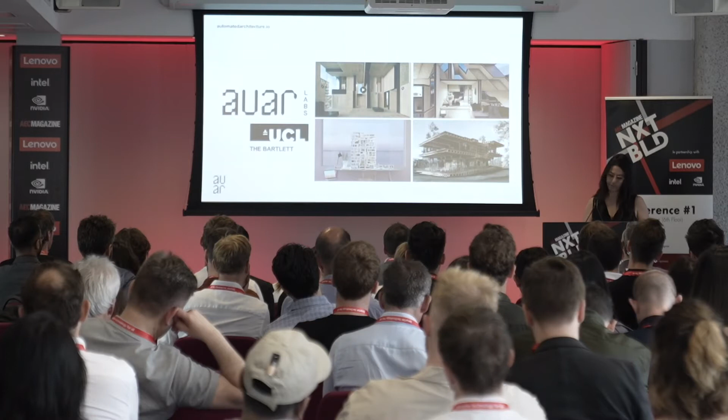So I'm going to be skipping back and forth between projects from the lab and projects from the company today, but I'm just going to set you guys up first before I show you some of those projects. So the work of the lab really fuels our mission to radically rethink housing production. We all know housing needs to change. We're not only in the midst of a housing crisis, but we're also in a climate crisis, and that's only going to exponentially create a worse housing crisis.

And automation is seen often as a possible solution to this problem, but we see a building industry that is really not set up for its adoption, and it struggles with outdated models of practice and power structures. So in our work, we like to think of how we can dismantle these practices, and how can we design an approach for architecture and automation that's better suited to deliver on these kinds of needs. And this really comes to the statement, we can't just automate the building industry. It must be entirely reinvented from the ground up.

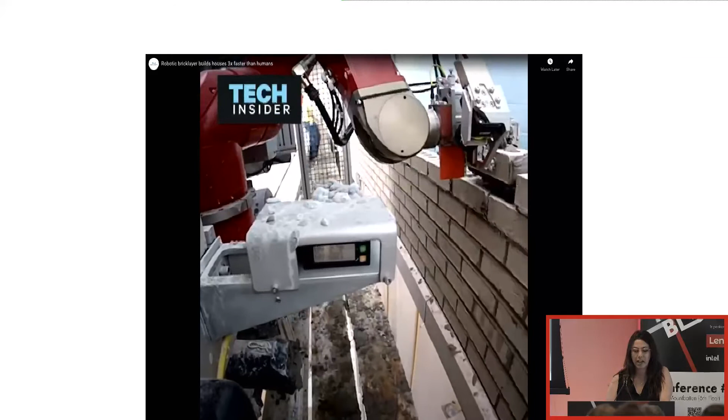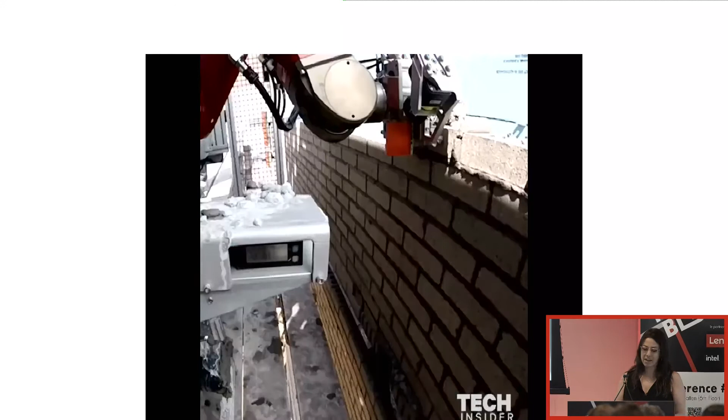So we see our approach to automation as providing an alternative future. And we're combating some of the most dominant media narratives around automation, such as our friendly bricklaying robot that steals jobs, but solves very narrow and very localized problems in the industry. We also see it as combating the idea around the issues around construction automation investment at the scale of the factory. We see, for example, modular housing factories resulting in the centralization of production to off-site factories, and these are very disconnected to the context in which these kinds of products are deployed.

And factory-made housing in the places that we're working is often seen as displacing local jobs, and this creates a kind of resistance and skepticism, not-in-my-backyardism, in those local communities. And it creates a very limited, localized capacity for housing produced using automation. And we know what's key to the climate crisis is this idea of localization, so we can't ignore this major issue.

Now, we like to think about the idea of the modular problem. So the efficiencies of modular construction are really compromised by centralized factories that take huge CapEx and OpEx. These factories require huge amounts of funding, and they result in a very long payback time. And the margins that are achieved here are relatively low.

Centralized factories require a high degree of repetition. They're not able to efficiently adapt to clients' briefs, site, or legal constraints, and this results in very repetitive, one-size-fits-all housing, or really this kind of almost lack of market. And the process of customizing these modular housing products is very expensive. Now, in this kind of model, construction still remains very fragmented, and bad habits from the construction site merely take place in a large shed.

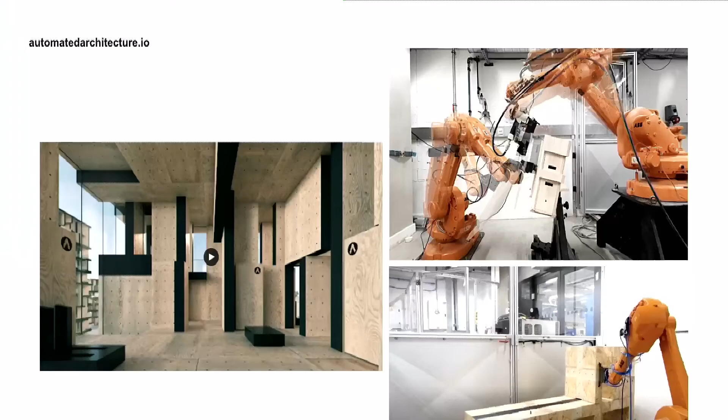And design for us touches on frameworks for labor, it touches on frameworks for interdependence, for policy making, and care. And it's really important to note that all of these practices are historically constructed, and they're designed practices. And insofar as they can be historically constructed, they can be redesigned and reconstructed.

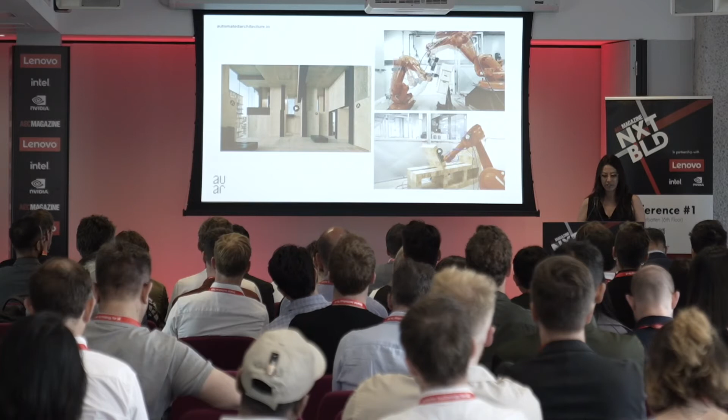And one of the ways that we've looked at this is through how digital architecture historically has tried to very much play innocent. But automation isn't innocent. Automation immediately forces positions. It forces questions about what a more automated society would look like.

Would we all need universal basic income in a world run by robots? Who owns these robots? What are the spatial and social structures that robots and other forms occupy? And how is our work and architectural production augmented?

We published a book three years ago where we explored these questions, called Robotic Building, Architecture in the Age of Automation. In the book we argue that there are deep cultural issues within architectural production that highlight the incapacity of current practices to adapt to automation.

When we use this term automation, we are forced to think about labor structures, platforms, data, but also about control and ownership. We're really forced to see automation as a design project. That was the real thesis of this book and has continued to be the thesis of AUAR.

So what then is an architecture or architectural framework designed for automation? What we've proposed in our work is a radical redesign of how architectural parts relate to automation, in two ways: both as a process and as a framework for production.

For example, in relationship to the context that we are working in, one of the questions we like to ask is how easy is it for people to access the benefits of automation?

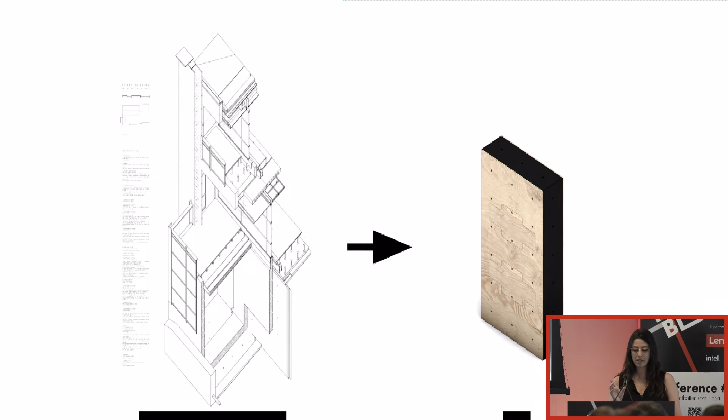What that has done in our work is resulted in a proposition that a significant reduction of architectural parts is possible, down from thousands to one. This enables a rethink around the dichotomy that exists between design and building cultures.

This is an approach known as the discrete, where architectural parts are not constrained to types like column, floor slab, beam, or staircase, and instead we think of them as similar to code. The same building part can be used to construct, as in this image from student work in 2017, every single part of a building structure.

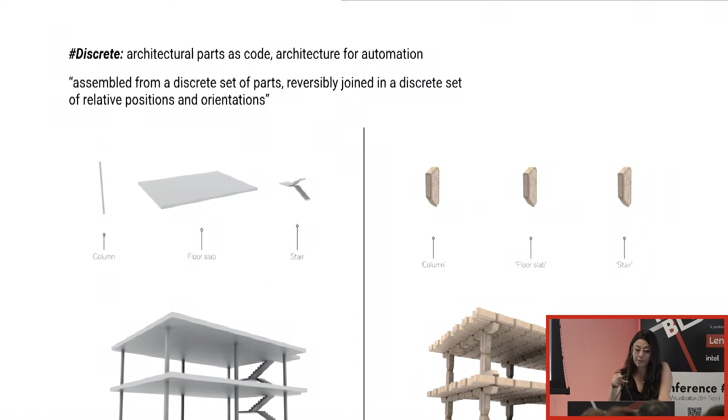Within this are values around the intersection between automation and material optimization. In our discrete housing system, one sheet of timber material equals one discrete building block that is repeatedly cut and can be manufactured almost anywhere in this just-in-time model for production.

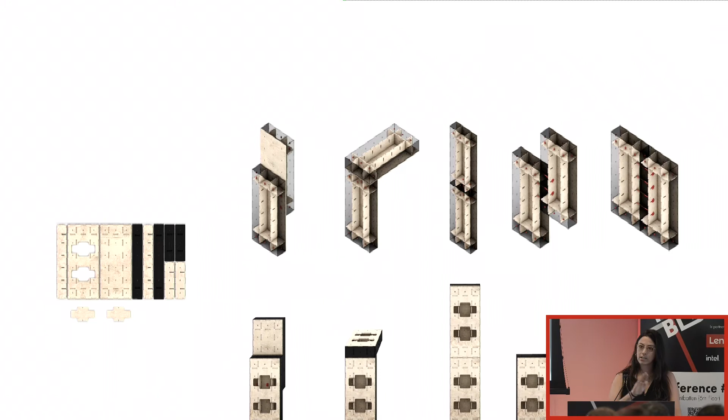This version of our building system is quite old now—a prefabricated post-tension system incorporating reversible connections that allow for reconfiguration and adaptation over time. As you'll see in later images, it's designed for both manual and fully automated assembly, from the scale of sheet to block, block to block, and what we call chunk to chunk.

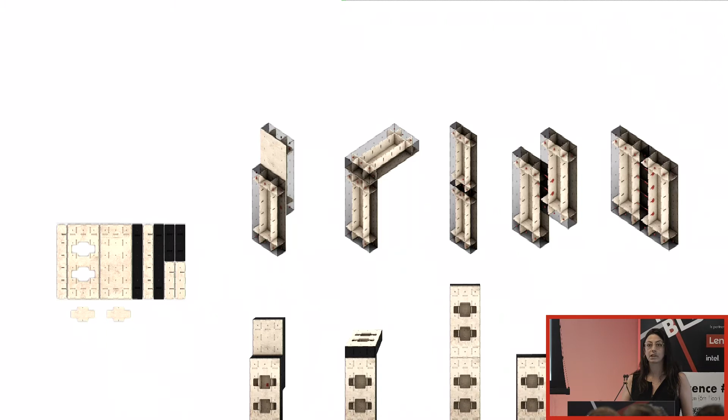This is based on principles of digital materials, a concept from mechanical engineering with principles of part variation and part reversibility behind it.

Part of the discrete approach is about embedding enough intelligence and simplicity into architectural parts to enable people to engage and interact with them in intuitive ways. Part of that intelligence is designing ways of working that can empower communities to participate in both the design and making, to take back this power and create the homes and spaces that they need.

This version of the block used very simple tools and required very little expertise and training to both prefab and assemble. In the spin-out company, we're now fully automating a new version of the block for prefabrication—from sheet to block and for building assembly.

That decreases the manual assembly tasks that we really, really hate to do. There's nothing worse than banging in a thousand T-nuts.

If we move a little bit away from an architectural part and towards the framework for automation and architectural production, we can largely acknowledge that automation has been largely centralized and largely extracted. So what we're interested in exploring is how we can embed notions of collectivity into frameworks for automation, where workers have ownership over the methods and modes of production, as well as the things they produce.

A key part of that for us is trying to design frameworks for automation that distribute expertise and keep the value co-created by the communities we're working with within those very communities that are producing. I'll show you how we're starting to do that in some of our more community-focused work in the lab.

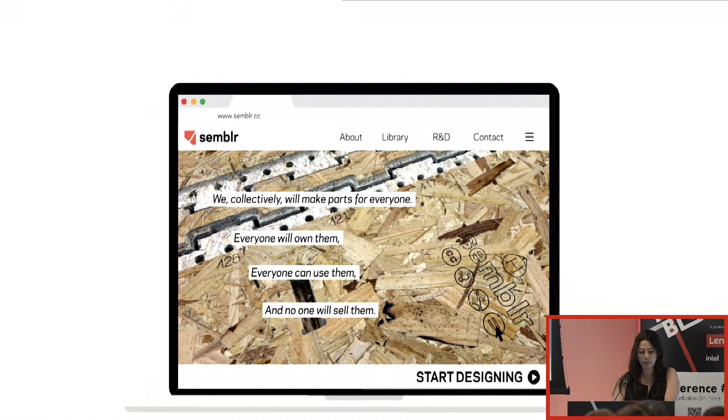I'd like to argue that a vision of automation as a design project can be one that really harnesses distribution. This, we say, demonstrates the capacity for automation to accelerate a kind of distributed abundance rather than scarcity, allowing us to amplify interdependence. It allows us to begin to confront marginalization and divisiveness that exists within the industry.

There are three core principles for us in our vision for automation. One, it must always confront the value systems and hierarchies embedded in architectural, social, and spatial practices by radically rethinking the part. We also must redefine automation's capacity to enable increasing access to architectural production. And we must always consider automation not as solving only very localized problems.

It must be transcalar and distributed. Now, the projects I'm going to show you really, I hope, speak to this vision.

For the last 3 years, we've been collaborating with two communities, primarily one in South Bristol, where I live, and a community in Hackney, East London, in very parallel ways. In both places we've been working alongside residents and local policy makers, because these are two groups that are very disadvantaged by the status quo, with a huge lack of trust from communities on one hand, and on the other a really significant inability to take risk.

So our work sometimes might look like a very localized project if we zoom in really close to these places, but we also see this as a large-scale project in the making.

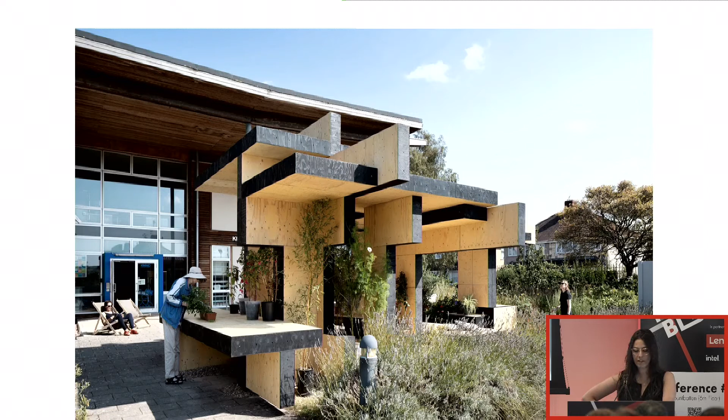This also acted as a training program for more permanent roles being created by some of our community partners in the We Can Make Homes project, which has identified 400 microsites in South Bristol alone.

In Block West, our group of 25 was also 50% women and people aged 17 to 76. We also had a 12-year-old one day, and she banged her thumb with a mallet, and we had to take her off the site.

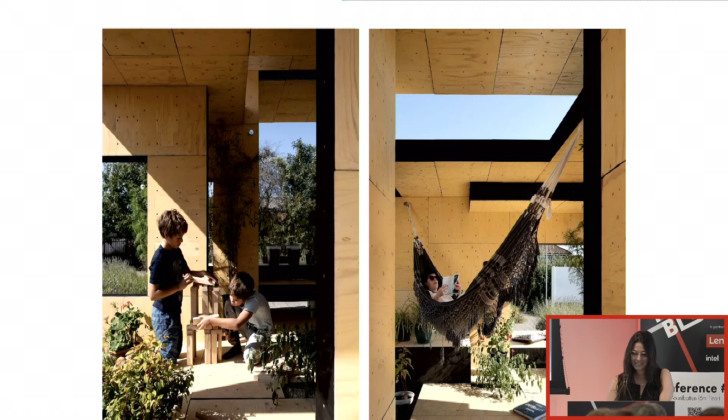Health and safety was questionable that day.

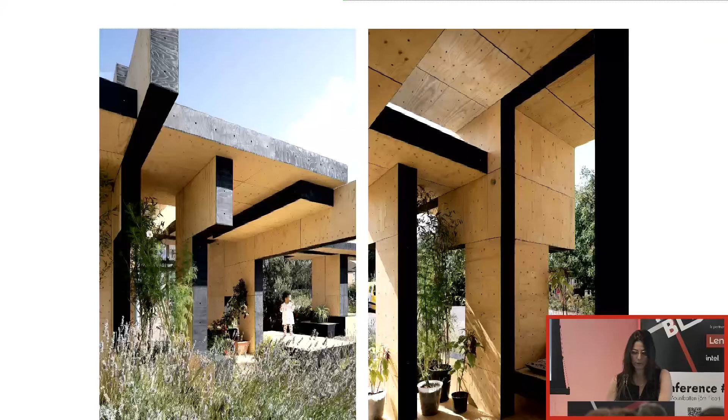But last year, we were really pleased because Block West was awarded the Architects Journal Small Projects Award for the Social Sustainability Prize. The jury noted the way that it engaged with local communities, describing it as an intersectional piece of architecture that goes beyond a building and raised important questions about how we live together.

Now, 2 years on, our patent-pending timber cassettes form the cornerstone of our technology stack, and this allows for increased automation and a hyper-short production chain. Our robotic platform enables efficiency in production with very low-cost assets, and our robots allow for this radical reduction of labor in the prefabrication process, but also improving on quality and precision.

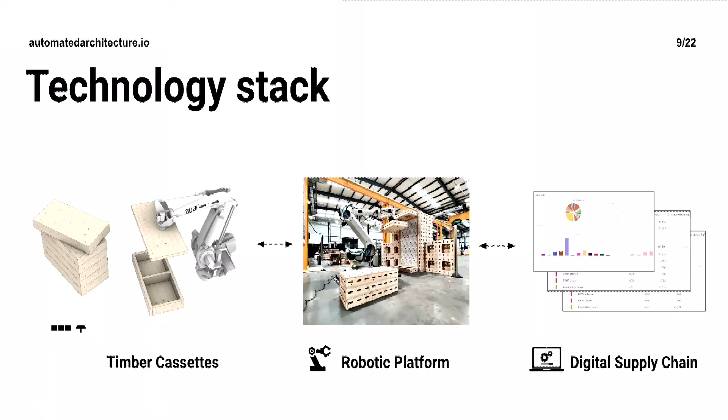Now, key to this is that, yes, we have cool robots, fine, but everything is really simulated down to the very bolt in our digital supply chain model, which I'm not going to talk a lot about — I know Next Build people love supply chain models. But we obsessively collect data on every part of our project, and because the timber cassette is so simple, we're able to do that.

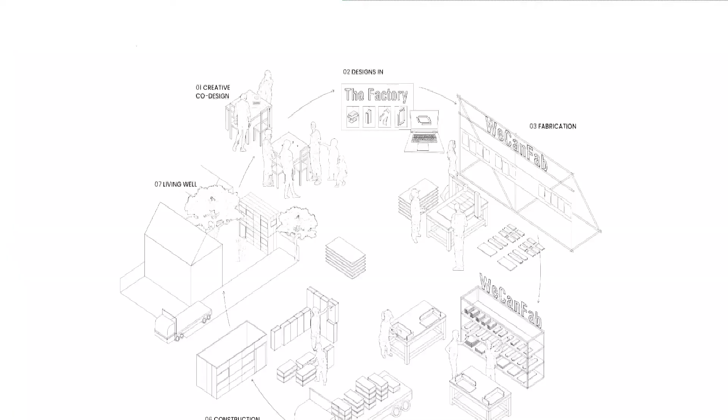So talking a little bit about how we've been setting up some of these projects. This is a project called We Can Fab, a citizen-led housing factory, also in South Bristol, funded by Innovate UK. We were part of the Housing for Inclusive Growth, 3.2 million demonstrator out there — a tiny, tiny little part of that big project. But we developed a digital manufacturing platform for multiple modular building systems, such as Mass Bespoke, U-Build, and Block Build, to be produced alongside ours in a localized microfactory setting.

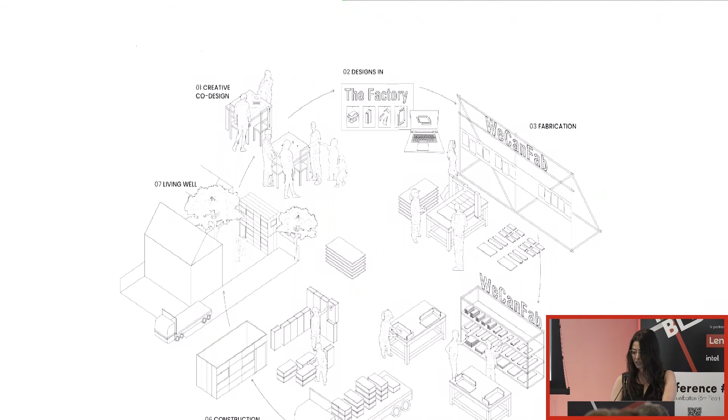And collectively, we imagined that this digital platform could be deployed in cooperative models for practice, where multiple practices are coming together to serve a neighborhood or a city or a region and their housing needs.

Now, we took many of these learnings from this project forward to set up our first microfactory with the support of ABB Robotics in Milton Keynes in the autumn of last year. We ended up taking the prototypical microfactory setup using our housing product and robotic integration to the Global Investment Summit in October as one of 12 companies selected in the UK as green tech innovators.

And then we accelerated this microfactory and iterated our product, prototyping a 2-story housing product earlier this year, where we secured a project for 15 homes we go on site for next year.

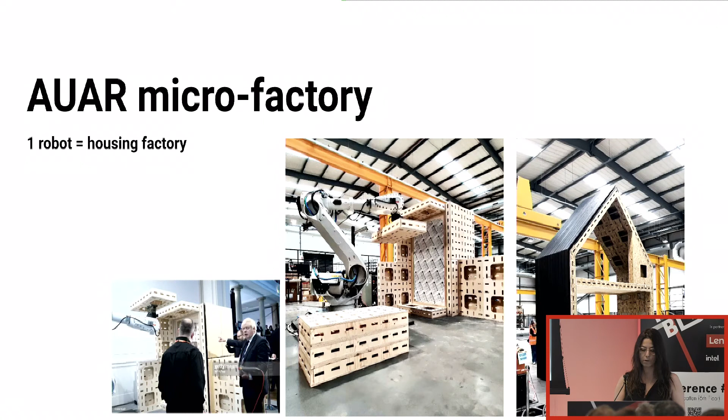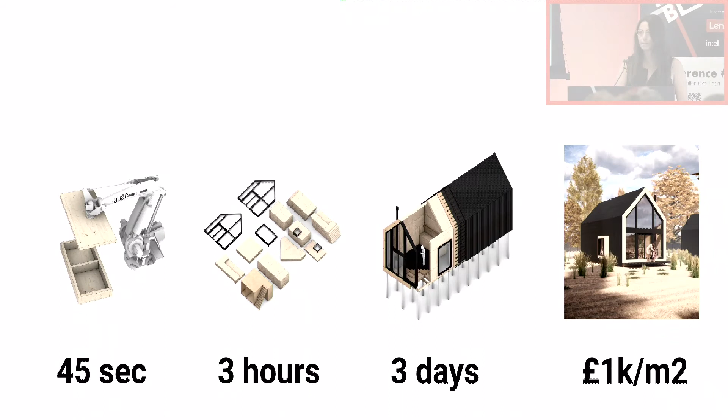So we can now achieve this. We can assemble our timber cassettes in 45 seconds. We can prefab all the parts for an 80 square meter house in 3 hours. We can assemble a house in 3 days, and we can hit a price point of 1,000 pounds per square meter. Our microfactory platform enables our projects to be adapted and customized to sites, client briefs, building codes, and we can do this at no extra cost because our production line is entirely digital.

We'd like to use the term "a house is not a car" because we can't use the same model, which is from the 20th century, to produce housing. It's too old, it's too boring.

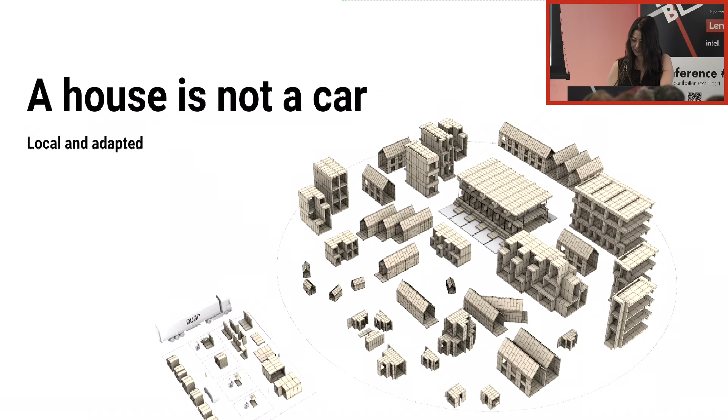Now, our work with the microfactories has also led us to co-develop the design of a community embedded housing factory. This is part of the WeCanFab project, and this extends existing fabrication and manufacturing capacity for citizen-led housing in South Bristol, and then over time is adapted into housing.

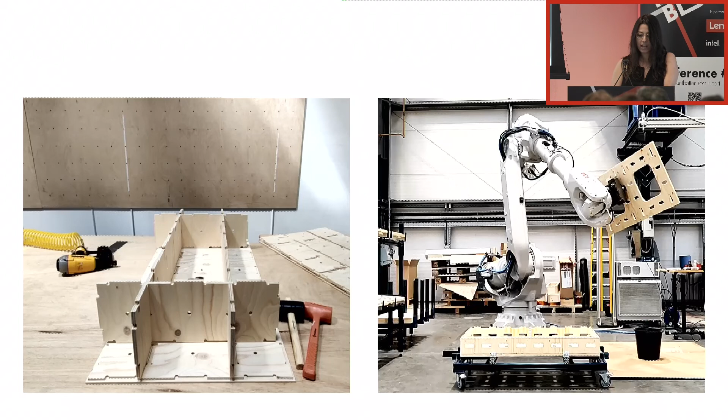In our work, we have engaged with how we can provide access to knowledge about these technologies. For example, in our work with 16 to 18-year-olds at New City College enrolled in a construction program, we provided a program of work experience, bringing young adults in contact with these kinds of technologies that for them seemed really distant and that they couldn't connect with. It was a really important piece of work for us because it allowed us to ask new kinds of questions around where we can impact on that knowledge gap.

So to expand on how to kind of deal with that knowledge gap, we've been working on this project in East London for the last 3 years that sought to make the potential of automation really tangible to local communities and begin to close that knowledge gap.

This is House Block, and it was part of a project with Hackney Council to begin to understand how it can use smaller bits of land. In London alone, there's 600,000 small sites that have been identified for development. Hackney Council calls them nothing spaces. I would say that they are not nothing spaces. They are incredibly diverse spaces.

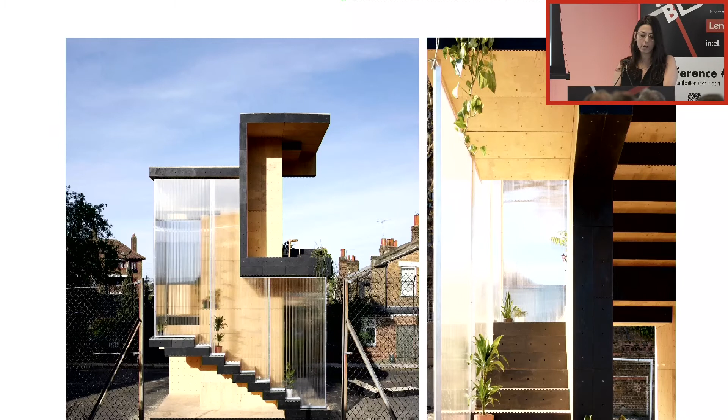And part of this project was about how can we engage local communities in network building for rethinking housing production. So House Block was built on a disused playground in Clapton in a hyper-diverse residential community.

It was adapted over time through a series of takeovers by our community partners that included Studio Wayne McGregor, East London Dance, the Building Center, Waltham Forest Future Creatives Program. And this formed a public program over the course of a month with sound installations and roundtables, performances, talks, you name it, we did it. We had an amazing barbecue.

It was, I think, the first opening after COVID. I mean, outside, so everyone was really happy, but it was the first opening.

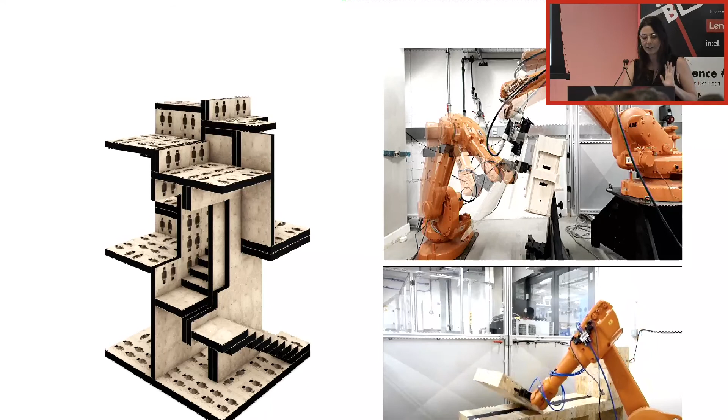We were quite chuffed. So House Block really began to explore the relationship between manual and automated assembly methods that we've been developing in our lab, trying to understand at what points and what moments in construction should we be embedding automation. And we see House Block demonstrating what could be achieved if we were to think about participatory approaches to housing, where local communities can make use of these modes of production.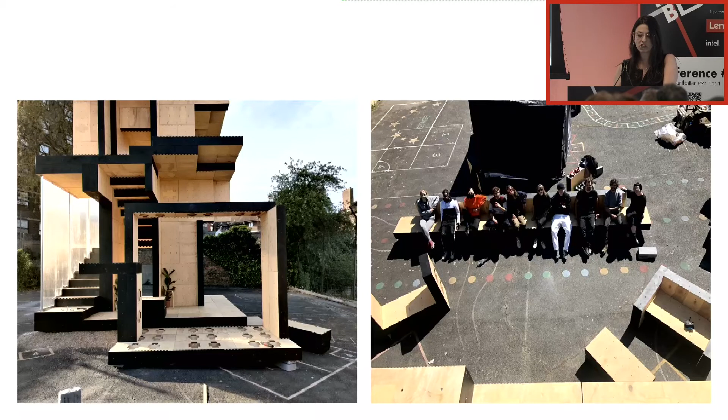And we've been able to show that this kind of project brings on board communities that are otherwise perceived to be disparate and disconnected in the conversation about the future of housing.

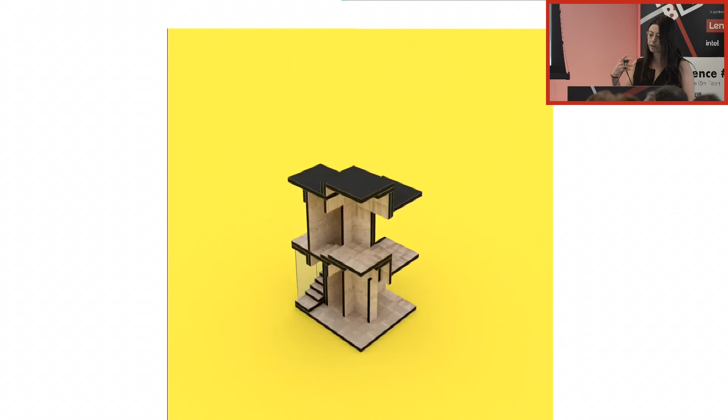House Block was an evolving and living project. This is a speculation on House Block, its takeovers, and then it turning into a housing project. And it was largely informed, the takeovers were largely unscripted and informed by the people that engaged with them.

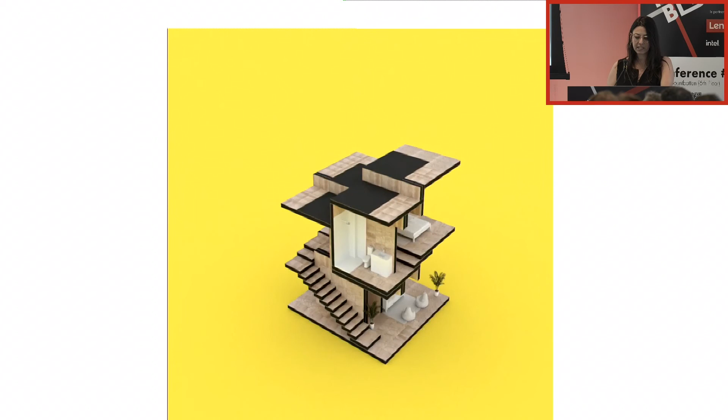We provided local paid opportunities for residents. We provided 60 part-time weekend jobs in the community, including providing childcare and tools. And some of these people have continued to work with us on other projects in different parts of the country.

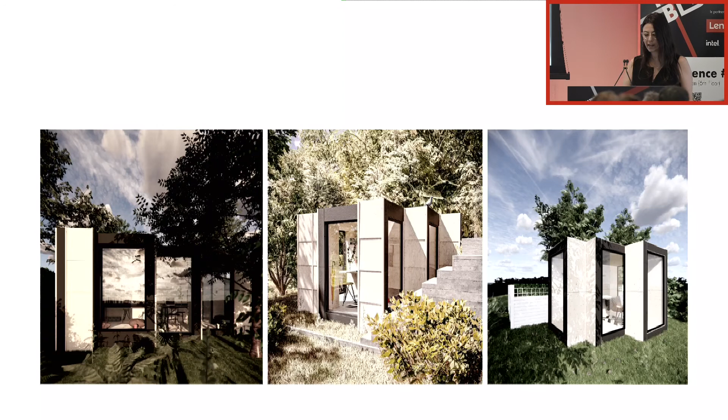So in the last year, we've launched 2 housing products, the first being a 1-story housing product designed for backyard homes, ADUs, annexes, meanwhile use, that sort of thing, garden studios.

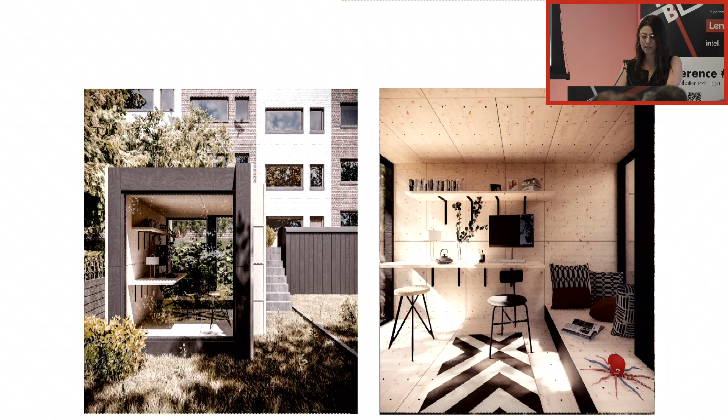These block studios use a small enough number of blocks to be able to fit in the back of a Luton van. This makes them super easy to transport from the production places nearby to their sites, and allows us to rethink what a factory might look like when it's embedded in a community.

This is guided by the overarching ambition to understand, through the lived experience of the people we're working with, what expanded ideas of housing production could look like, what they could offer smaller sites, and how it could scale up to larger sites.

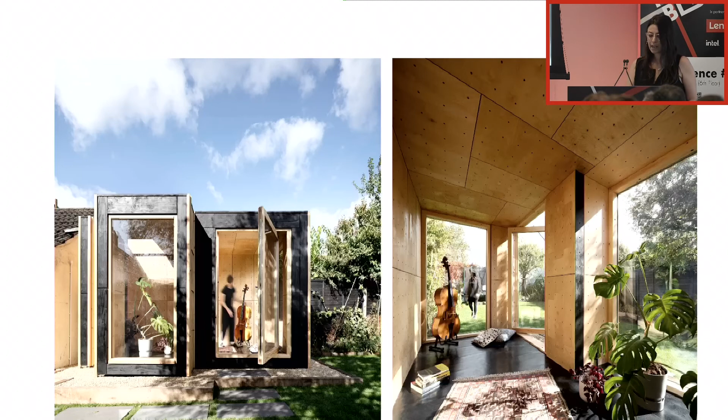We're further developing this approach alongside our partnership with ABB Robotics, which enables us to test and iterate our microfactory approach. We have new jobs being opened within AUAR called Maker Builders, who will work alongside our systems automation team, embedding traditional crafts within the business as well.

The next stage of our work has those maker builders embedded in the communities we're working within, in microfactories that can fulfill communities' ongoing housing needs, which we see as key to the social infrastructure that fills the knowledge gap around automation.

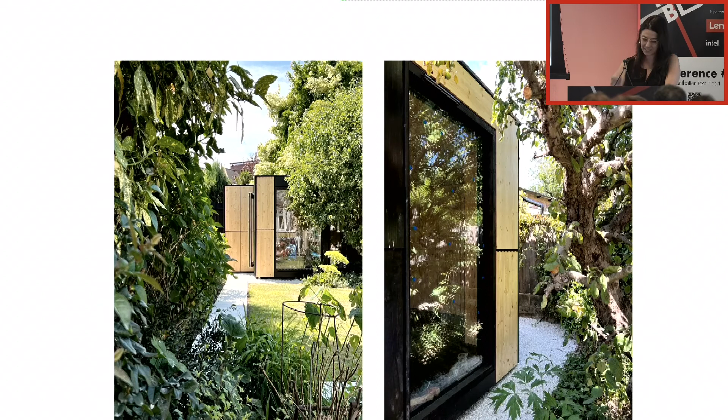This is a project we finished just last week. We're having an opening on the 1st of July for a small family in South London. It's 50 square meters, designed to adapt to their needs over time, with the floor plan allowing smaller spaces to be created longer term. The small family has young children who will become big children who need their own space.

You can see us next at Somerset House, the summer festival This Bright Land, in August, where we've designed the clubhouse at the center of the plaza, again using some of the ideas around house block to engage a much wider, very different community. This is an event sponsored by the Mayor of London, just announced last week.

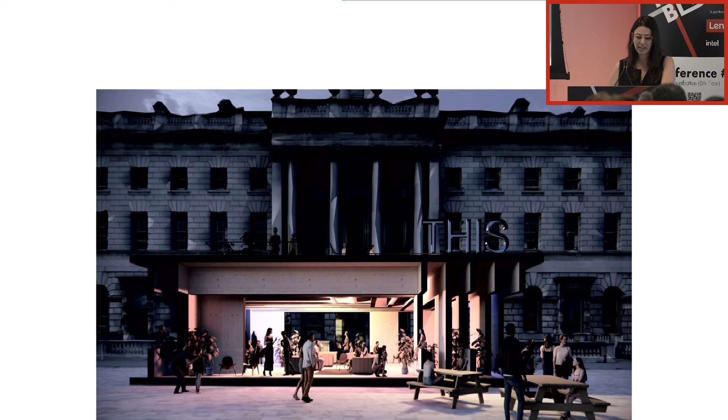But taking on this infill problem and continuing the community-focused temporary projects is really not the end game for us. We see that smaller scale of 1 to 2 stories as a way of de-risking our processes and technologies to take on larger projects, working with developers at first and eventually becoming developers ourselves.

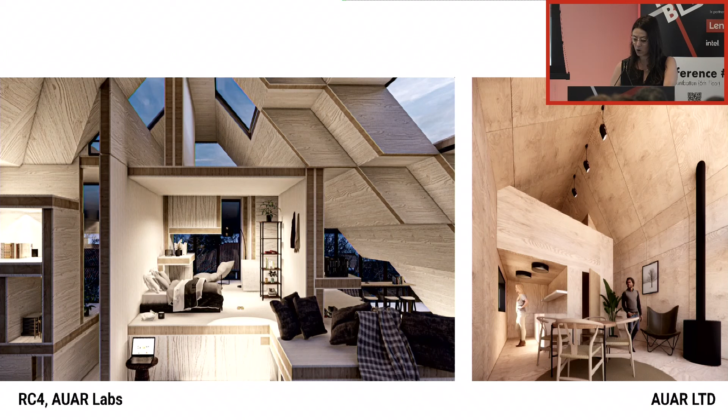The end game is really not just changing the way that we build, but changing the way that we live and how we buy, own, and trade the spaces we live in. Thanks very much.

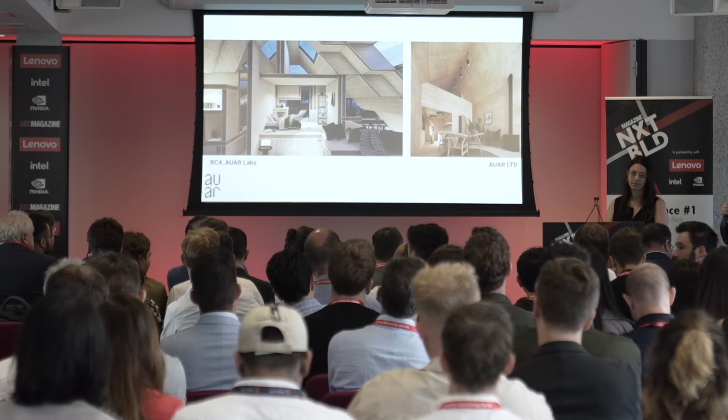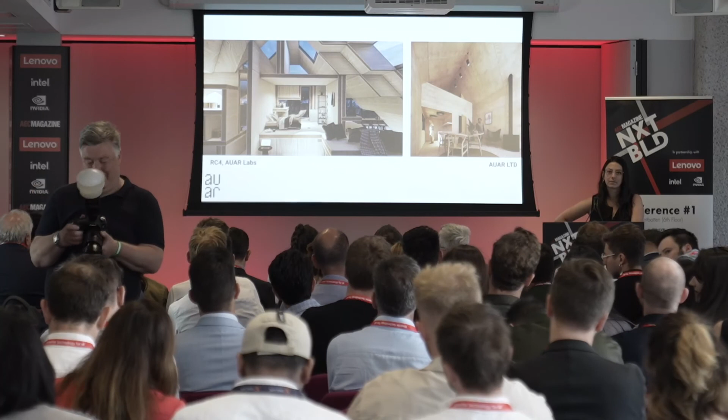Hi, Mollie. Hi. Kieran Garrick from Allies and Morrison. Firstly, that was really fascinating, so thanks for presenting that. Quite a specific question, I guess.

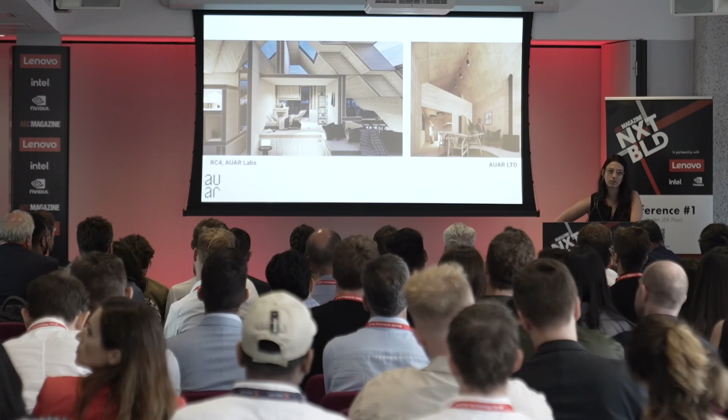One of your first videos showed the robotic simulation of building a brick wall with mortar between it. Your concept here is clearly focused on assembly, and I assume disassembly too, so it has the sustainability credentials that go with that. Do you think, when we think of off-site construction, that the idea of 3D printing of buildings and the use of, let's call it glue instead of assembly, doesn't stack up anymore?

Short answer is yes. I've had a lot of conversations in the last 24 hours about the promise of high-performance concrete, and we see that happening in other startups in California that I shall not name. But I see those as very static, oftentimes not really able to adapt over time. And what's key to providing some alternative to the climate crisis is adaptation.

We know this from nature, right? So what's key in our building system is not the block itself, it's the connections between the blocks. That's where the intelligence really lies, and that connection allows us to embed adaptation and predict what that might look like. Everything is modularized down to the bolt, which allows us to predict things like durability issues and be able to take bits out and replace them. That creates a whole other kind of landscape for the way we think about our homes and how our communities can serve our needs.